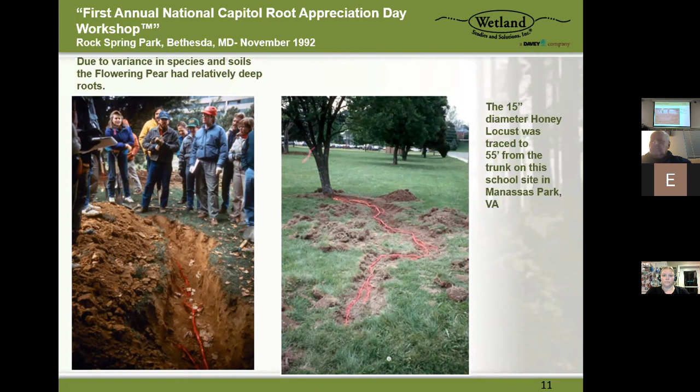In the pictures, you'll see the roots, after they're uncovered, are painted with chalk paint to make them visible. They're not really bright orange — in one of these other pictures, I think they're white — but I always get that question. You can see that they're very shallow.

And they go a long ways away from the canopy of the tree. Here's an example: this is a Norway maple, only 12 inches in diameter, and it's got roots mapped out 36 feet from the trunk of the tree. With some of these, it got to the point where the roots were so fine that we just couldn't follow them anymore, but they did keep going. Most of them are very shallow — the top few inches is pretty typical.

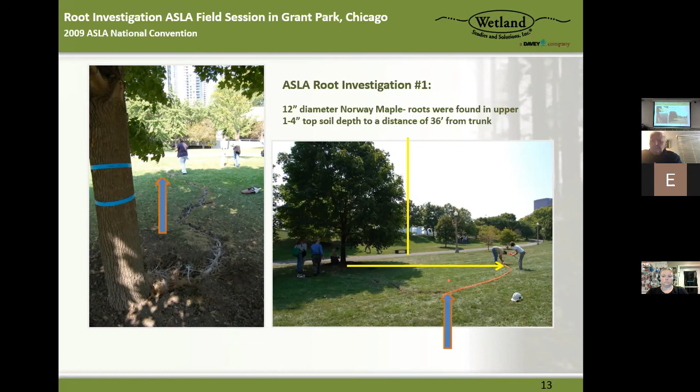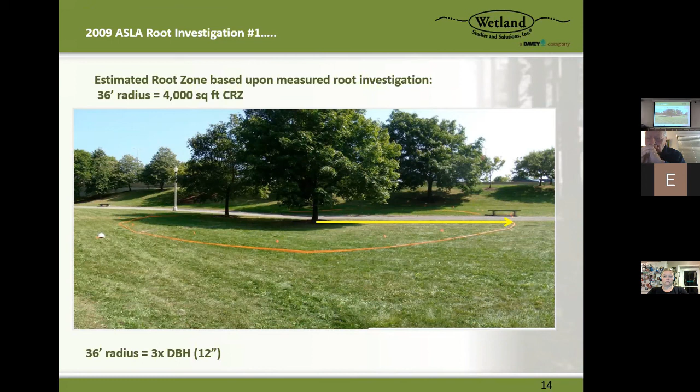Okay, come on, there we go. So here's that same maple tree with a 36-foot radius circle shown around it, and that's where its roots were.

Here's another example, a 30-inch hackberry, and this was a more compacted site, so the roots were slightly deeper, but still, we didn't find any roots deeper than about 18 inches.

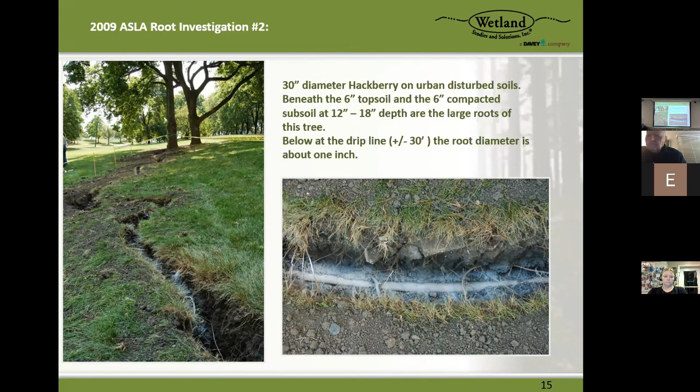And the roots went out 76 feet. Again, we traced them out until they were nothing but little thin fibers, and it got to the point where we physically couldn't dig around them without just destroying them. We couldn't follow them any further, but they did keep going.

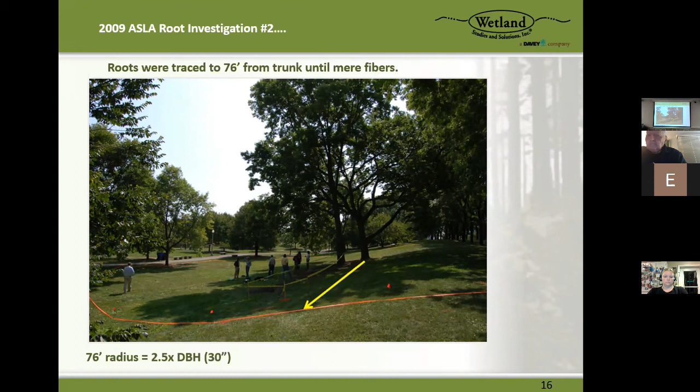So we need to think about construction and think about what the issue is. Obviously, the issue is root damage. It's the most significant problem with development.

Roots can be damaged in so many ways on a typical construction site. They can be cut by utility trenching, grading, just general excavation. There's soil compaction from equipment and material staging, all manner of construction traffic, compaction from fill soil, and there's also the potential for chemical contamination, concrete washout. Just all of those typical construction activities have some impact on roots.

So that begs the question, if we know what tree roots typically do, how much root damage can a tree withstand? How do we figure this out? And how do we get trees in the process, so to speak?

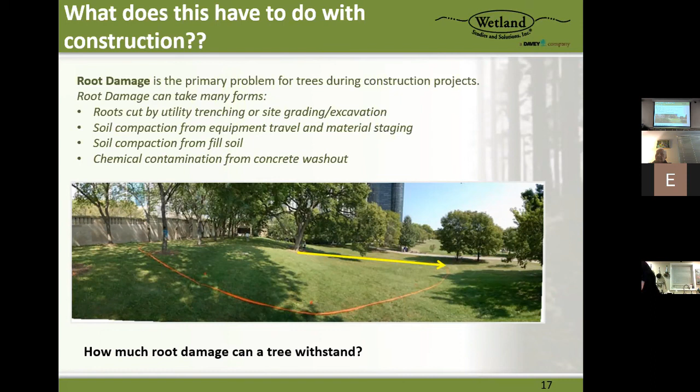But I always kind of throw this in, and let's not forget where trees came from, what they are used to, what they want. Trees don't really want to be near us. They don't want to be near our buildings. They don't want the crummy urban soils that we stick them in.

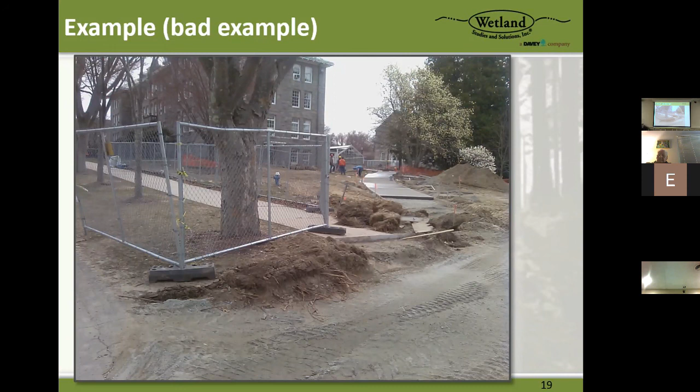But really, if you look, you can see there's roots sticking out. Clearly, there was a pretty significant amount of root damage that occurred on this site with these trees, even the small ones. So here's another example, similar situation.

They've got these existing trees. They dug down probably 10, 12 inches, put in stone, backfill, compacted it, and then poured their concrete.

And remembering what that root system looks like, it's usually pretty shallow, the top 12 to 18 inches, generally not much more than that, if ever, and often much less than that. So a relatively shallow excavation, like for a sidewalk, you're only excavating 8, 10, 12 inches deep. A lot of contractors or engineers might say, oh, it's a shallow excavation, it shouldn't be a big deal. Well, as far as the tree is concerned, that's almost its whole root space. So even though it's a shallow excavation, it's still really significant in terms of the tree's world.

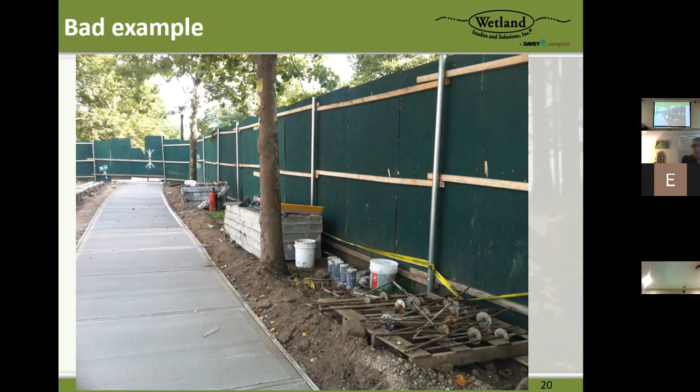So this is a situation where these trees are not very happy. So here's what we do, right? The tree's in the way of the activity. We want to put in a curb.

So we go in, we cut the roots, and then what happens? Well, the tree falls down because we've severed the roots, and now the tree has no way to hold itself up.

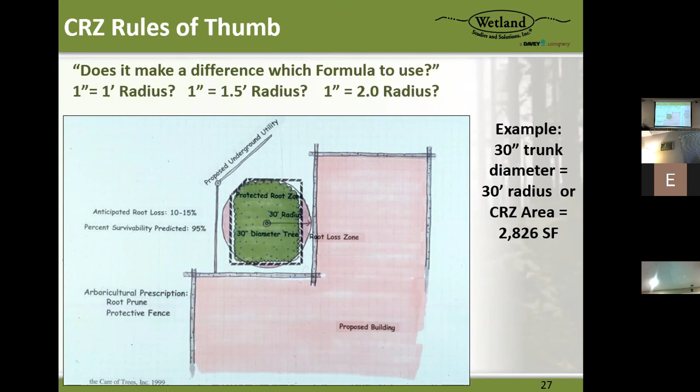But - come on, move forward - what if we draw it at a 2-to-1? So this is 2 feet of radius per inch of diameter. Now, do we feel very good about that tree's prospects?

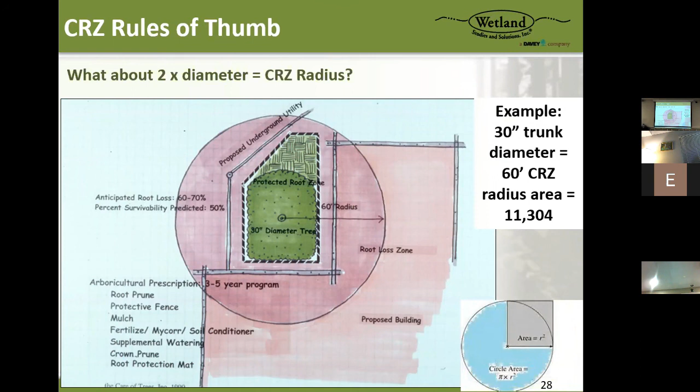No. If we think this is more accurate as far as what the root zone really needs to be, then we're anticipating 60 or 70% of its root zone being disturbed. At that point, you might have years of mitigation, and even with years of stress reduction measures and careful handling, it still is not likely to survive. So we like to look at that 1.5 feet of radius per inch of diameter as a good, reasonable rule of thumb.

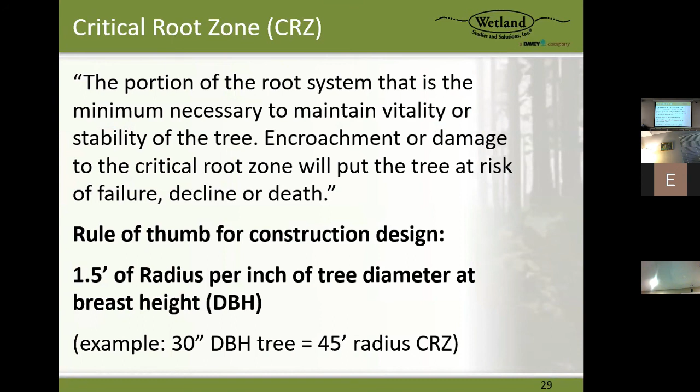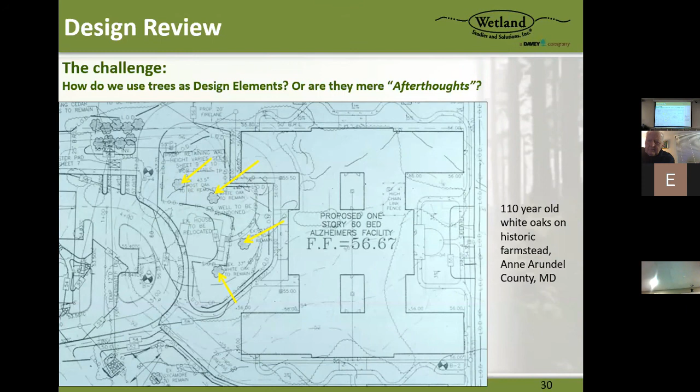One thing I always like to mention at this point is the locations of these trees, especially big trees. The location is critical. Unfortunately, all too often tree inventories are done with GPS that's not survey grade, but what we'd call natural resource grade or even consumer grade GPS. There's a lot of apps out there, and you can use your phone or any handheld GPS unit to inventory the trees on your property.

Those units might seem accurate, and they might claim to be sub-meter or whatever, but in reality, if they're not survey grade, they're probably plus or minus 10 meters. They might be perfectly on, but you have no way of knowing that. You could be 30 feet off. And if you're off even by 3 feet in a design, that could be the difference of the tree being next to the sidewalk or in the middle of the sidewalk.

So having the trees truly surveyed as a part of the design process is really critical.

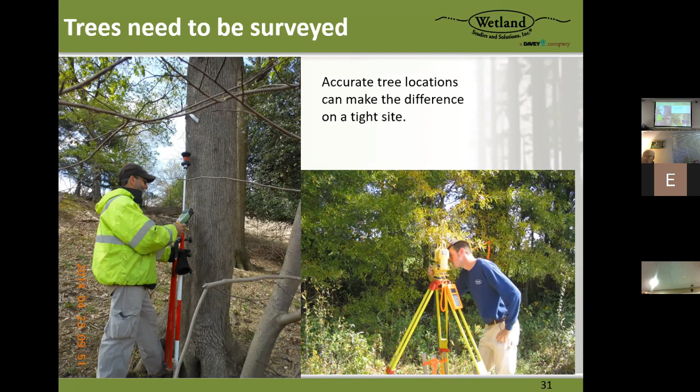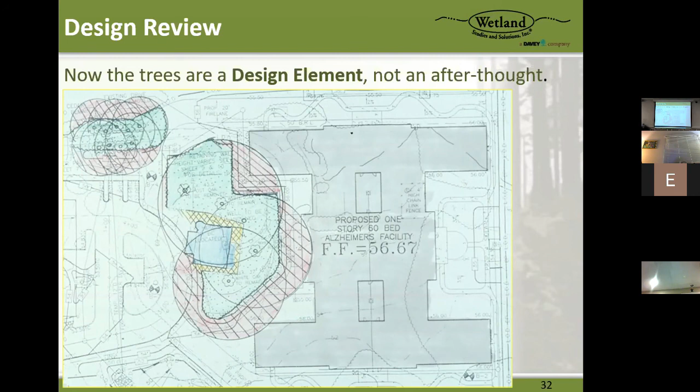The other thing we consider in addition to this concept of critical root zone is structural critical root zone, where this is a much smaller circle around the tree that represents its most significant structural root plate. Meaning if we disturb anything in there, cause any root damage in that little tiny circle, even if it's relatively minor, it could mean the tree becomes unstable. Not necessarily that the tree is going to die, because the overall impact could still be pretty small. But if we have damage to roots within this zone, we run the risk of the tree becoming unstable.

And I always tell my clients, well, it doesn't matter how green the tree is if it's horizontal. That doesn't help us.

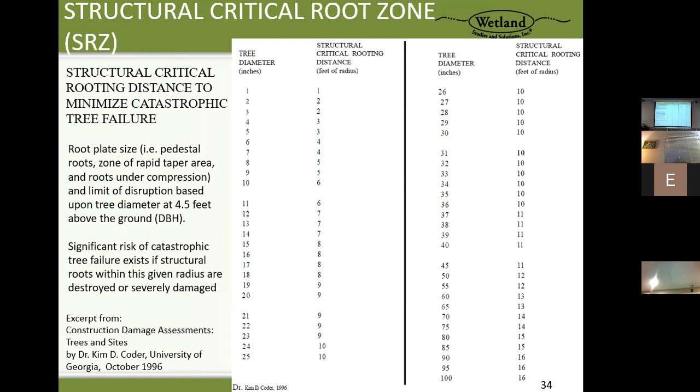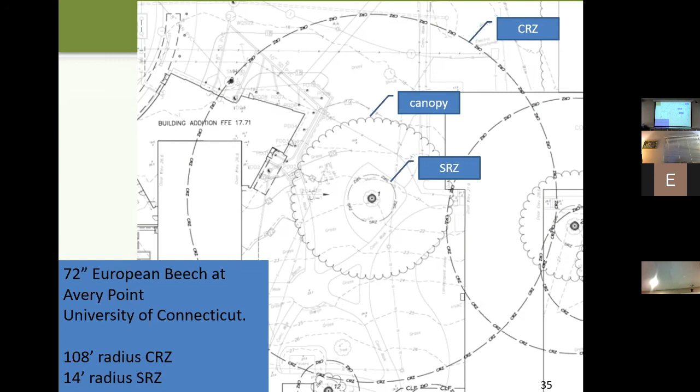So I think I mentioned this before, a little bit about municipal requirements. Municipalities do all kinds of crazy things. Different people means different interpretations, different priorities, different agendas, and every municipality has different people. So you can figure out where that goes. You go to different places and there are very different focuses.

For example, in Fairfax County and Arlington, they both have requirements for canopy credits. There are other places where you have specific requirements for tree replacement counted by individual trees and not just overall canopy. There are places where their requirements don't look at individual trees at all—they simply look at how much tree canopy you have on the site and how much you're preserving. Loudoun County, for example, is like that, where they don't really care about what any one specific tree is doing.

They want to look at the big picture, the canopy of the whole forest preservation. The Maryland forest conservation laws are very similar to that—they don't really look at individual trees so much as the overall forest.

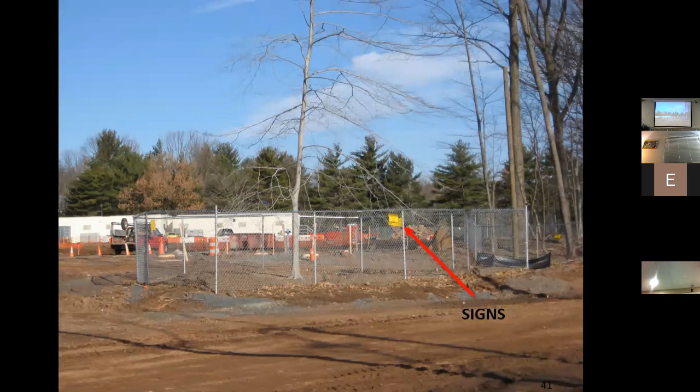Here's a good example of a fairly small tree with a good protection zone around it. Sadly, the last time I looked at Google Earth, this tree was no longer there. This is a project in Princeton, New Jersey—a graduate housing facility that was being renovated.

One of the other more common basic treatments is root pruning, which can be done a number of ways. The simplest is mechanical root pruning, using a chain trencher like you'd use to put in a utility, or in this case a rock saw—a circular saw with teeth like stump grinder teeth that can cut right through pavement and works really well. But the idea behind root pruning is not to protect roots, it's to cut them off intentionally, with some measure of control.

If we draw a line in the sand and let the contractor go to town, they'll go in with an excavator and start digging. Any roots coming into that area get pulled to the side and tend to get torn and broken. So instead of having the roots cut methodically in one known spot, they get broken, smashed, and frayed, and that type of damage is much harder for the tree to deal with than a relatively clean, controlled cut.

A chain trencher or rock saw is still not as clean a cut as you'd get with a chainsaw, handsaw, or pruners, which sometimes we do. If it's a critical location or critical tree, we might prescribe excavating with an air tool or by hand, physically cutting the roots with hand tools, a chainsaw, or even a sawzall, to get as clean a cut as possible and minimize the stress that cut puts on the tree.

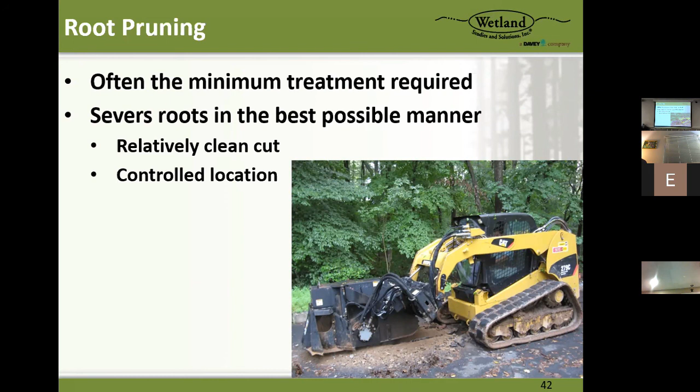But most development isn't looking to spend a ton of money on preservation—they're trying to balance tree preservation with everything else that goes into development. So on a large development site, no one tree really matters that much; what matters is a reasonable effort across a lot of trees. These treatments become the standard go-to approach: fencing, root pruning, and mulch.

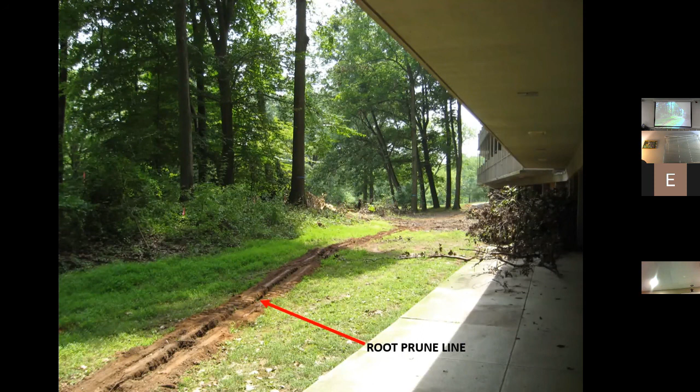So here's just what typical construction details look like. This is what would actually go on the construction plans for the contractor to install.

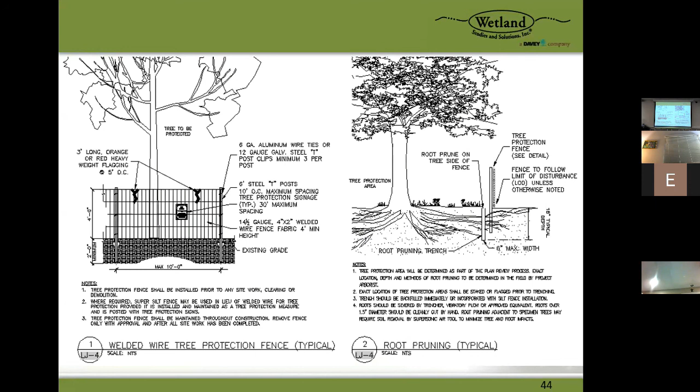And I mentioned mulch. Mulch is probably the single simplest and most valuable thing we can do for trees as a stress reduction measure.

Trees and turf don't like each other. So if we can put down mulch, we can minimize the competition that trees and grasses have by removing the grasses and providing mulch. The mulch mimics that traditional forested condition where the leaves are falling and decomposing.

And you've got nice organic material there for the tree roots. That's what the trees want. Remember the picture of the mountains and the trees. Picture the understory of those trees - that wouldn't have been grass. It would be leaf litter on the ground. That mulch mimics that condition.

The other thing that mulch can do, especially on a development site, is help manage soil moisture. So if we've got a construction site with that limits of disturbance line - that line in the sand - we know we're going to lose all the roots over there. But if we cut off the roots where we know we're going to lose them, and then do everything we can to protect what's left by putting some mulch down in that zone, right where the roots are cut and back into where they're preserved, it helps manage the soil moisture, which further reduces the stress to the tree.

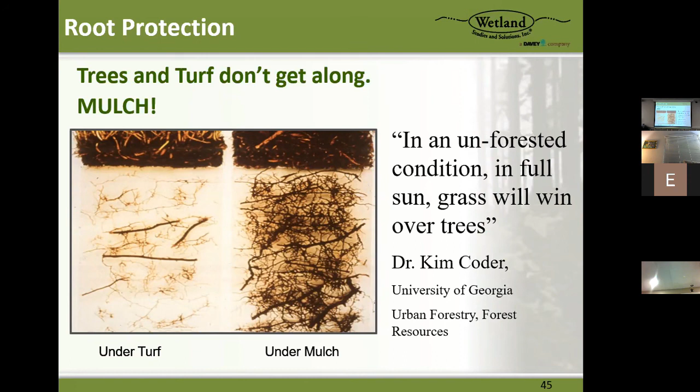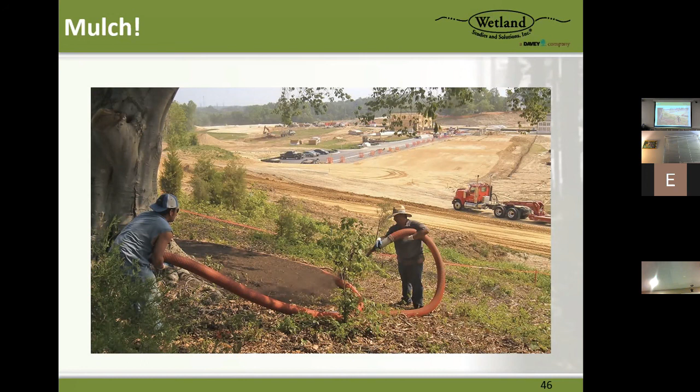So there's some other really cool things we can do, thinking outside the box, to provide additional protection to tree roots on construction sites where historically they might not have been able to be protected.

So this is an example of what a temporary staging area or a temporary construction access road might look like. And this is what it looks like in reality.

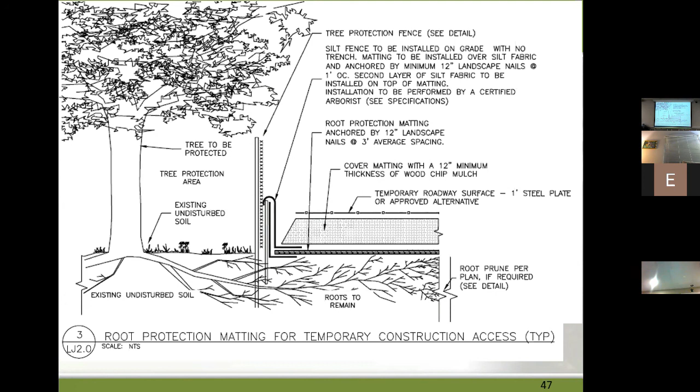They were moving it around with equipment and so forth. So we designed this temporary protection zone, very similar to this design, where there's mulch and a matting material that provides some separation and protection to the tree roots to help minimize soil compaction during the staging process. And then when it was all done, this was all taken away and put back the way it was. The design minimized the soil compaction that would have resulted from that staging material.

So what if the impact is a permanent condition and we want to try to save roots under a permanent new structure? Here's an example of what we call root aeration matting, where we would put this down.

At the beginning of the project, before they bring in any fill material, and instead of root pruning at the limits of disturbance, we're able to use this material to put the fill on and move the root cut further away from the tree.

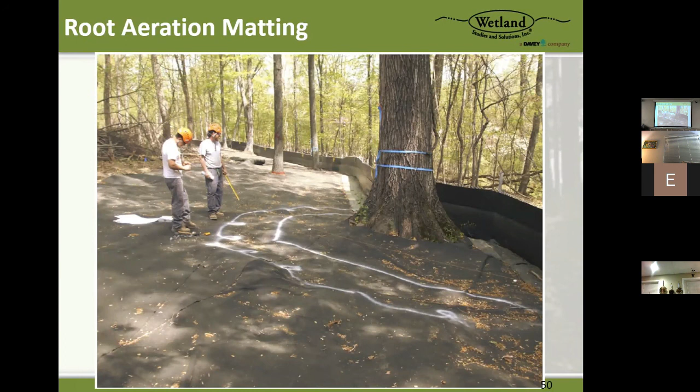Yes, that is a long-term situation, that doesn't happen overnight. The matting material will last for many years, so it takes a long time for it to break down, and a long time for the tree roots to work their way up through it, but they definitely will. Does that answer your question? But that's the whole concept here, that we're buying the tree time to adjust to its condition.

So how are we on time? Oh, we're flying right along.

So here's an example project. This was a project in Maryland where there were a couple of very large trees adjacent to an existing house, and they were proposing to do some additions.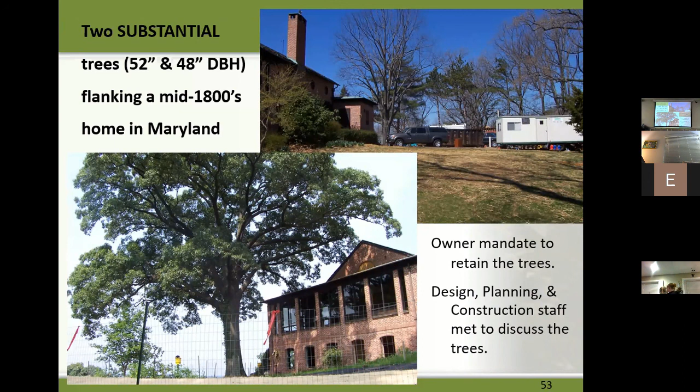This picture shows how close the tree is to the house, and how large the tree is. In the foreground you can start to see some of the markings on the ground where they were considering placing structures, and you can imagine that's well within that tree's critical root zone, probably within its structural root zone.

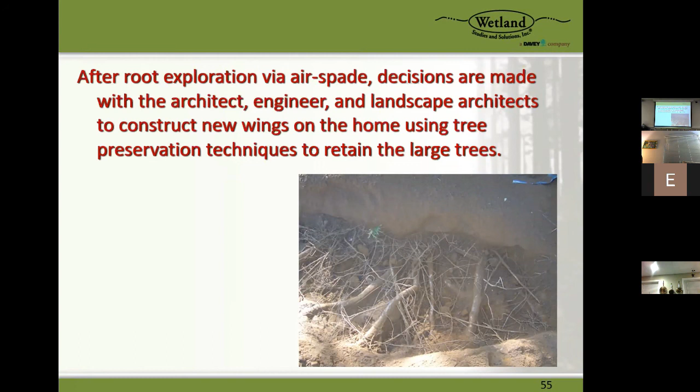This was one of the rare conditions or projects where we actually got the opportunity to go out there and dig up the roots, figure out exactly what was going on, and then work with the design team, the architect and the engineer, to massage the design of the project to minimize root damage and work around the tree as best we could.

So there's an idea of what the site looked like. And here is where we've done some root pruning, and also provided some temporary root protection matting - you can see the fencing material.

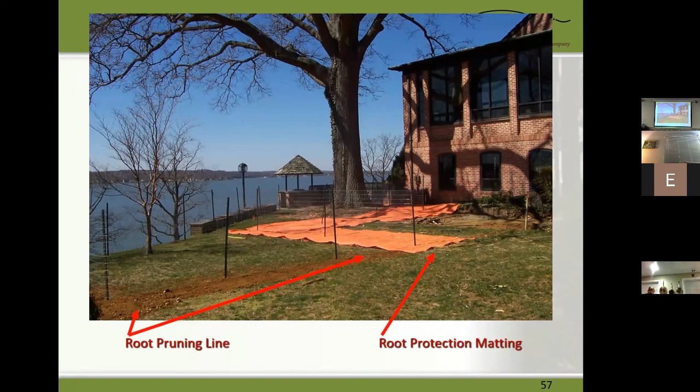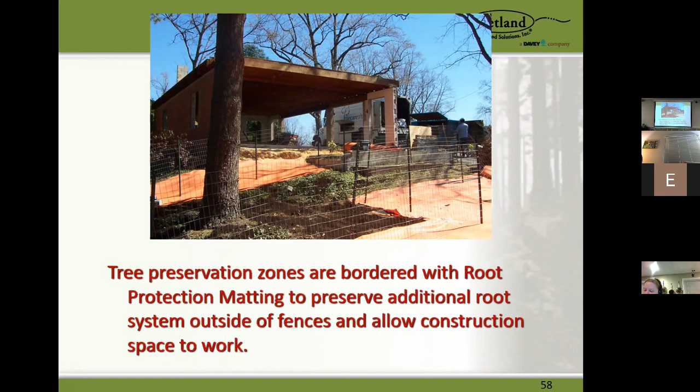The root protection matting, the orange matting, is intended—again, that's a temporary condition like the staging area—only in this case it was really meant just to protect the tree roots from the construction, the contractors' workers, from essentially just their foot traffic and wheelbarrows and things like that. You'd be surprised how much soil compaction just foot traffic can cause. But the matting material helps to mitigate that so that they can go in and build what they need to build and still have those roots survive that condition, or survive that activity.

The other thing that was interesting here is we knew that if they were to go in and build using a traditional footing and foundation wall type construction, there would be no way to do this successfully and preserve the tree. So the solution was to design the structure with pier and grade beam and a fully supported floor, so that there was space between the piers where tree roots could be left alone and left to survive underneath the new structure.

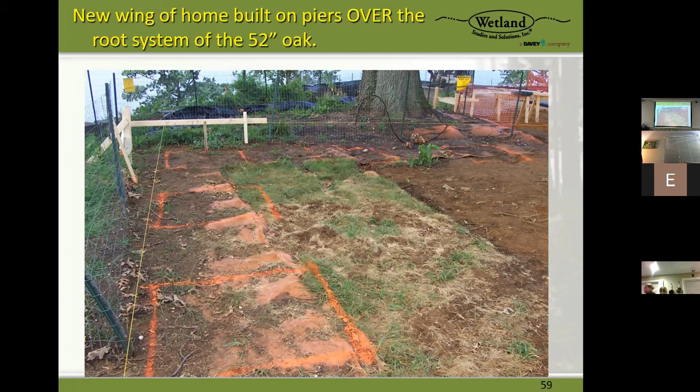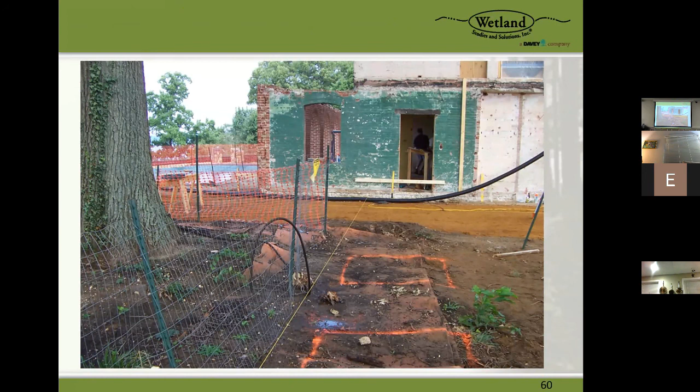So again, that's more pictures of the pier locations mapped out and the tree. And here was the process for excavating the pier holes.

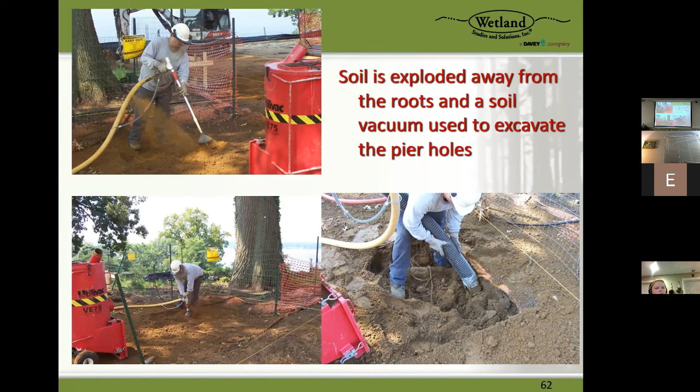The red thing that you see there in the pictures, what is it called? Utility vac—we always called it the supersonic shop vac—where this thing gets connected up to a big commercial industrial air compressor, and they use the air tool to blast the soil out of the way and loosen the soil all up, and then they use the supersonic shop vac to suck the soil out of the hole. In doing that, they were able to gently get all of the soil away from the tree roots.

Once they opened up these holes, we were able to field adjust the pier locations. We had to prune some roots, but we didn't prune all of the roots. We were able to adjust the location of the pier so that we didn't have to prune the biggest roots. You can see in this picture there's a really large root and a bunch of smaller ones. We probably cut many of the small ones to accommodate the pier, but we were able to shift the pier around to avoid the largest roots. And because we're doing piers, there's space between the piers where we didn't impact any roots.

Personally, I don't think so.

The question was, how long can you leave roots exposed? Is there a time limit? I've heard different arguments on that. Some specifications require wrapping the roots with burlap, then moistening them and wrapping them with plastic, and all of this and that. Personally, I don't think leaving a tree root exposed is significantly detrimental—maybe that's the polite or correct way to say it. If you think about it, everybody's seen tree roots that are surface roots. Everybody's seen a stream bank that's been eroded where tree roots are exposed. They're still healthy, they have bark on them. Bark does its job, and just like the bark on the trunk of the tree protects the viable tissue below it, the bark on the roots will do the same thing. I'm not pointing at any specific research or study that says that—that's just my own anecdotal experience that I don't think it would be a huge detriment to leave them exposed for at least the duration of a construction project, where this would have only been open for days or a week, maybe a couple of weeks at the very most, if that helps. So that's my philosophy, if nothing more.

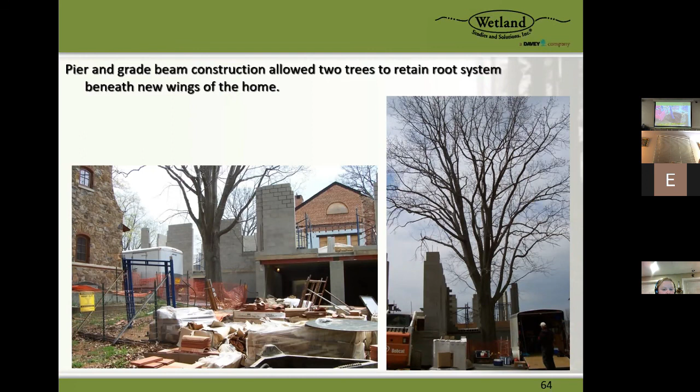But let me get to why this thing stops moving forward. In this picture—where's my mouse—you can see this is a relatively modest addition, relatively small footprint compared to the size of the critical root zone of that tree. So, like I said, the construction activity was well within, even for a tree of this size, the structural root zone. If we were to do this using traditional methods, that tree would have zero chance of survival, or nearly so.

And actually, it would have been likely to just fall over and hurt somebody. This method allowed us to preserve not only the roots under the structure, but the roots beyond it. This tree's root zone goes way out in the yard in all directions on the other side of this new structure. Because we didn't sever the roots for the new foundation, those roots we worked around were able to keep going out the other side. So yes, there's an area underneath the footprint of the building that's going to have a little less moisture, but all of the rest of the roots are still there.

Just like I said with root protection or root aeration matting, trees can handle change that comes slowly. So it's entirely probable, in my mind, that the fine fibrous absorbing roots directly underneath this structure will probably slowly die off as that soil dries out some. But the larger roots that connect from one side of the structure to the other are still there and still able to do their thing.

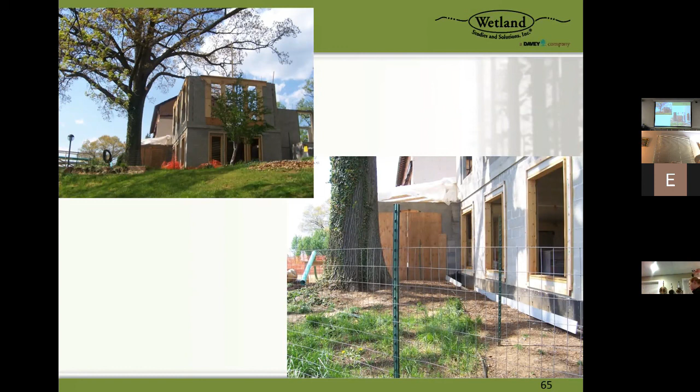All right, shift gears a little bit and talk about utilities.

Utilities are the other big factor with development. We can't have our society as we know it without utilities.

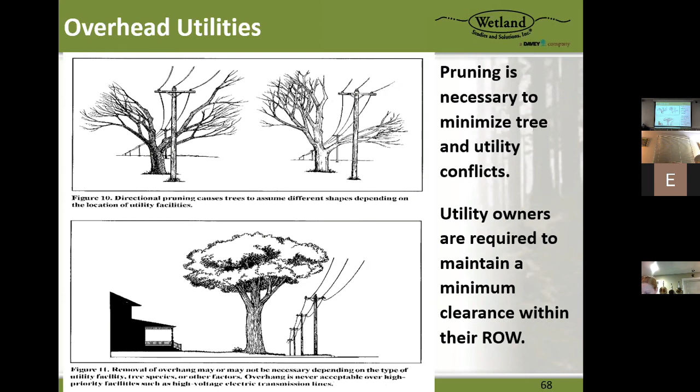Now, what would be better yet is the right tree in the right place. I'll talk about that a little more in a second. This is another example of the same kind of pruning. This is a tree with a good shape. With a little bit of pruning, that utility can be maintained without destroying the structure of that tree.

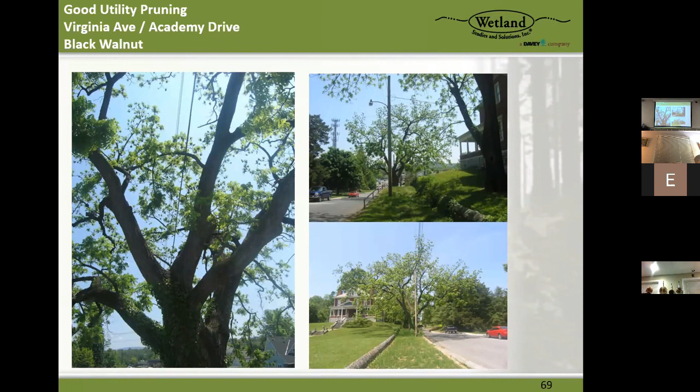And like I said, right tree in right place. Sometimes we don't have a choice. The utility is where it is, the tree is where it is, and we have to deal with it. But if we're designing, we want to design and plant new trees that are appropriate for the space. So we wouldn't put trees that are going to grow big in a space where they can't. We would put small trees underneath power lines and so on.

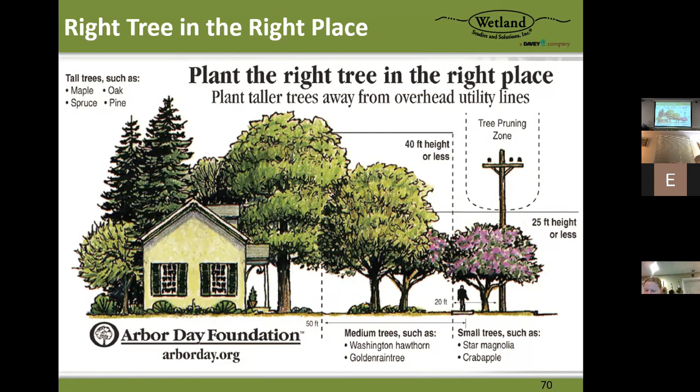There's another example, sort of an extreme example of utility pruning, but as ugly as that looks, that's a whole lot better than the alternative of having the tree be topped every year.

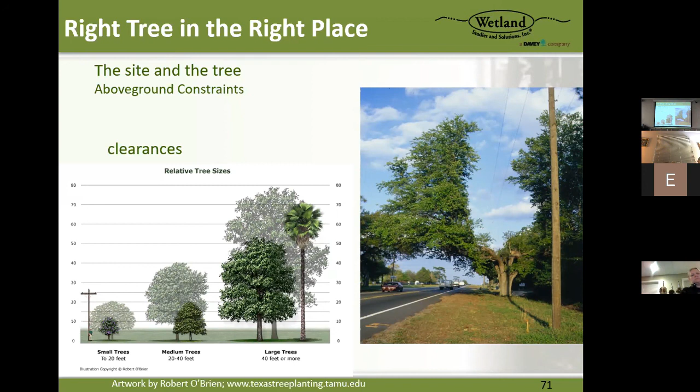But I want to talk about underground stuff because I like roots. And again, in my world, we deal with construction and design. We're almost exclusively dealing with tree roots.

So here's an example of a simple utility. I'm not sure if that's a stormwater drain or something like that, but it's a relatively small utility in a relatively small trench, and most contractors or designers might look at that and go, that's nothing, that's not a big concern. But if you look really closely, you can see that there are an awful lot of roots in that picture. And yes, I stole these pictures off some random website.

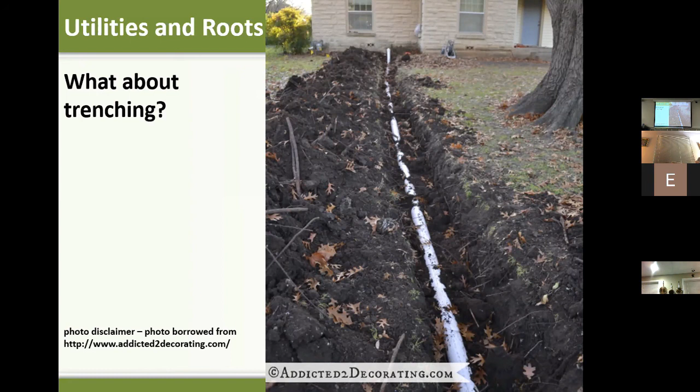This way, there we go.

So again, how far away should that trench have been? If we're looking at the critical root zone of this tree, I don't know how big it is, but if it's 30 inches or more, that trench should have been 40 to 50 feet away to minimize impact to the structure or critical root zone. But this is a little suburban lot, so they probably don't have enough space to move the utility that far away. So there's other ways we can deal with that.

And this was a park setting, and there were trees everywhere. And of course, being the State Capitol Park, there was no room for error. We were told flat out, well, we need to keep all the trees. So we were tasked with coming up with construction methods and protection measures that they had to deal with. The contractors weren't super happy with it, but the end result was the trees survived and the client was happy.

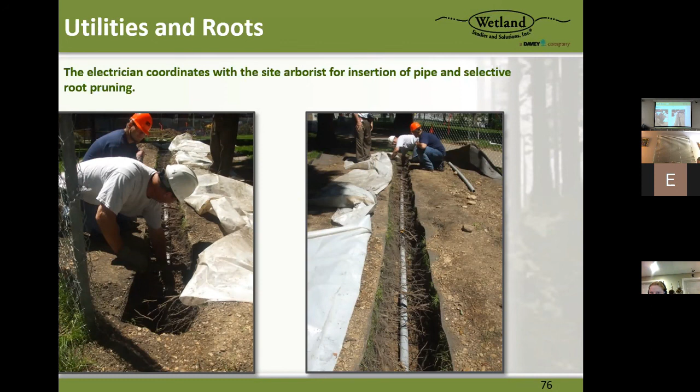So there's a few other ways we can deal with it, depending on what type of utility it is. A lot of either pressurized utilities, things like domestic water service, gas, natural gas, or dry utilities like electrical conduits or telecom, can very frequently be installed using directional boring.

And this stuff is fascinating. The technology that they can sit that little machine down and use sections of pipe, push it in the ground one section at a time, but steer the thing all over the place. They can steer it wherever they want.

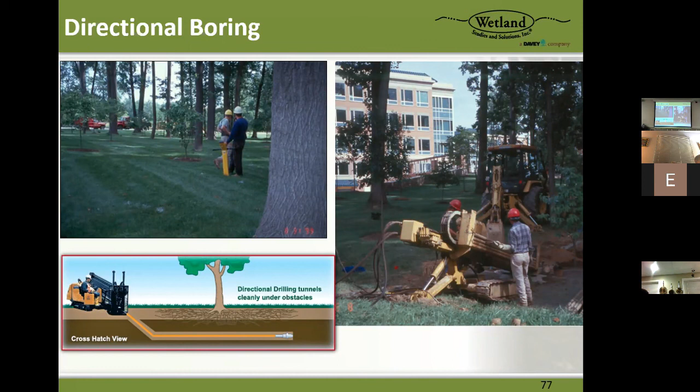Now, thinking back to that Morton Arboretum poster with the root zone, we know that tree roots are fairly shallow, and most utilities want to be deeper than that. So if the design team says, well, my water line needs to be below the frost line, and that's 42 inches, I can say the tree's roots probably don't go that deep, or if they do, very few roots are down that deep. So if they can install their utility using this kind of technology, as long as any excavations needed to connect it are outside the critical root zone of the tree, there's essentially no impact to the root zone. We can drill underneath the tree and avoid that impact almost entirely.

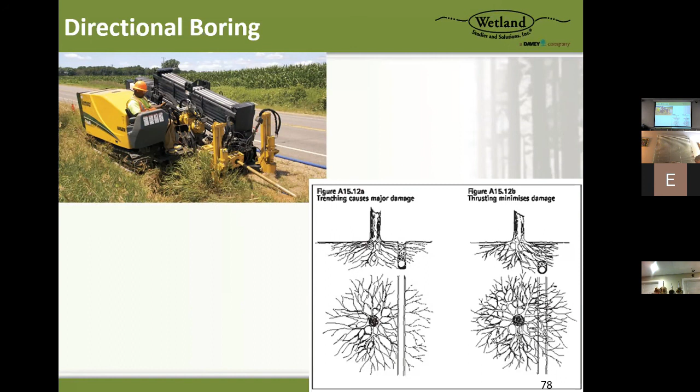So there's the comparison. If we put the utility in a traditional trench, where we open trench, dig a trench, put the utility in and backfill it, we're going to cut off all of those roots. But if we drill underneath the tree, we can sort of sneak underneath there and the tree doesn't even know we're there.

So what about those types of utilities that can't be directional bored? Things like gravity sewers, storm drains, and sanitary sewers that are gravity very often can't be directional bored. Or if they can, well, you really can't do directional boring with gravity. Or, like I said, it's just so large that boring is not really an option. It's too cost prohibitive, so you're in this condition of an open trench. So now the impact from this kind of construction is pretty substantial.

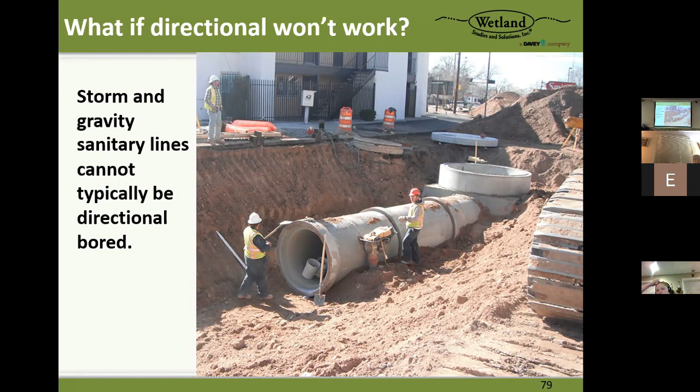So let's talk about an example project. This is New Haven, Connecticut. Traditional sewer system in the town. It was a combined sewer system, if I remember correctly, a 60-inch brick combined sewer where the sanitary and the stormwater were all in the same pipe. The pipe was installed in the 1800s, hand-laid brick. They built the road on top of it, and it's been there ever since. This was still in service up until, I don't remember what year, but certainly within the last 10 years.

Their project was that the city had grown up to the point where they'd exceeded the capacity of the combined sewer. So their project was to separate the sanitary from the storm. They were going to keep the original combined brick sewer and dedicate it to stormwater, and add new dedicated sanitary sewers that were separate.

So the project moves forward, engineers design it, and somebody raises their hand and says, wait a minute, what about our trees? This is New Haven, Connecticut, right near the Yale campus, so you can imagine there are people there who might care. And you can see there are some trees worth caring about, some pretty colossal sycamore trees.

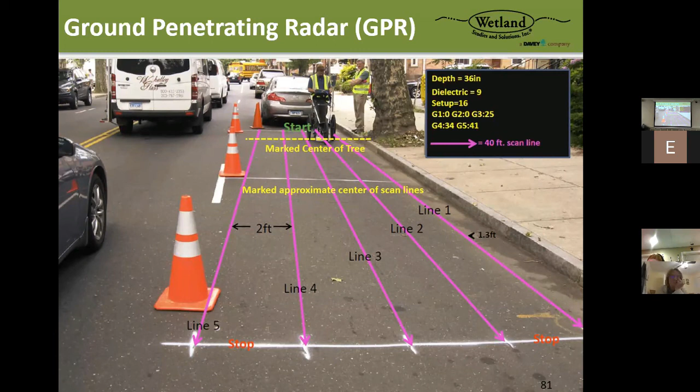So here's an example of how we scanned. We laid out the scan lines in the street and ran the radar over it. This is a friend of mine, Cary, up in New York.

There was a reporter who came out to the site while they were doing this. This was kind of a big deal, and the guy that worked with him coined the phrase that the buggy—the radar unit, the antenna sits in that little tub at the bottom, and the control unit up top—looked like a baby carriage. So the fellow that works with Cary coined the phrase 'the ugly baby,' and of course that's what got printed in the newspaper. Cary's still not happy about that.

And Cary looks like Grizzly Adams now. He's got a hell of a beard.

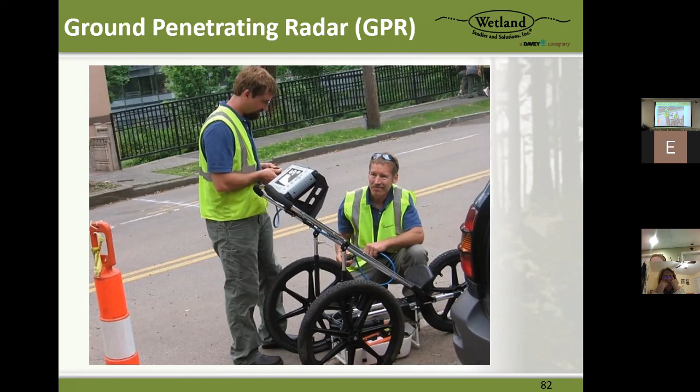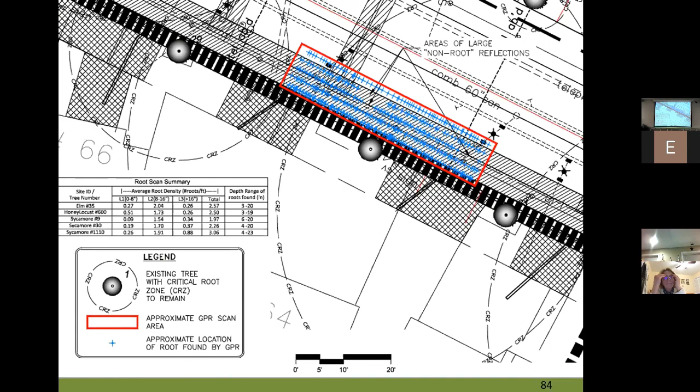There's a critical root zone circle here from this tree, but the critical root zone for this tree is actually way over here. You can see each one of those little blue dots is actually a root detection, where the radar equipment saw a root under the pavement.

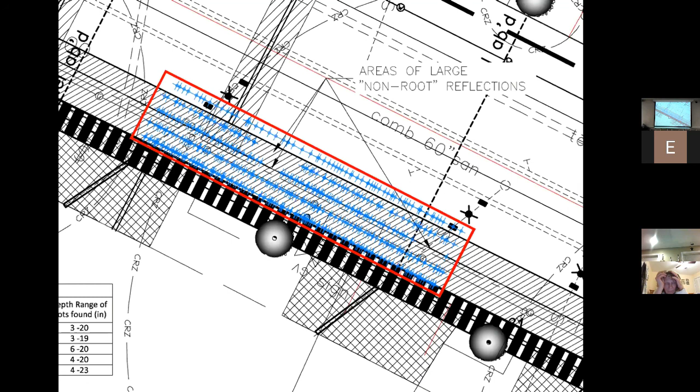So we could demonstrate pretty clearly that there's a lot of roots in the street. So if we do a traditional open trench here, we're going to have some pretty substantial root damage.

So back to the drawing board, we worked with the engineering team on this and came up with the solution of doing what's called jack and bore, where instead of using a directional boring machine that sits on the surface and drills down, they actually dig pits and put a horizontal jacking structure machine in the pit, level it and get it all aligned just right. Then they bore and push the pipe into these holes, and on the other end there's a receiving pit where the thing pushes all the way through, and then they reset and do the next section and so on.

We did almost that whole street this way. The result was, I just talked to my friend Alan who lives in Connecticut, the fellow from our team who was local to the project and did all the field work for us. He said he drove by there the other day and the tree was still looking really good. There was one really large sycamore in particular that was pretty key to the project and drew a lot of attention, and that tree is still doing very well, which is good to hear.

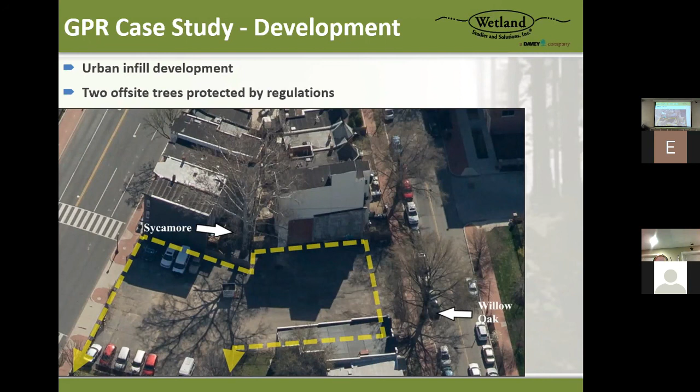So here comes the radar unit again, where we weren't really able to access the site to dig it up with an air tool and map individual roots. And frankly it was a fairly large site anyway, so digging it up with an air tool would have been a pretty colossal effort. The radar unit was able to scan both trees over a fairly large area of the site in less than a day.

So you can see the large sycamore tree there behind the fence on the neighboring property, and you can see the white markings in the pavement is how we laid out the scan lines. Then the willow oak that was the street tree, you can see the sidewalk and the fence, and we ran straight line scans in front of that.

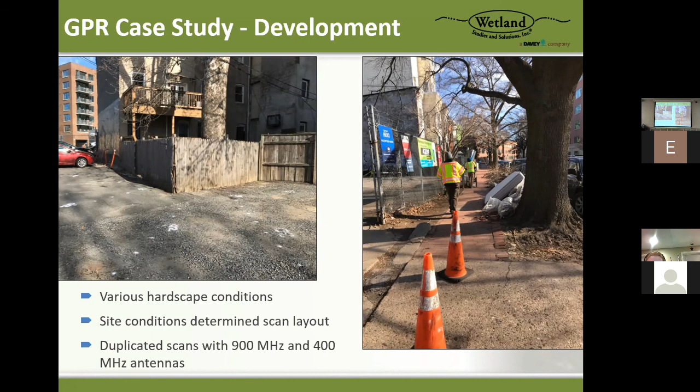You can see how the scan layout looked, where we ran arcs for the sycamore and lines for the willow oak. We actually ran two different antennas that we have for our radar unit. The 900 megahertz antenna is capable of getting reflections down to about 36 inches, and it can reflect off and get a signal back from roots as small as a quarter inch. The 400 megahertz antenna can see and get a reflection back from almost 12 feet in depth, but it can only see roots half to one inch and larger. So if we're looking for deep roots or large roots, the 400 is a good option.

On this site, we really weren't sure what we were going to find. On an urban site like this in DC, who knows what kind of activity has gone on over the years. We didn't know what was going to be down there. So we actually used both antennas and scanned over all of the scan lines twice. We did them all with the 900 and then did them all again with the 400 so that we had double data.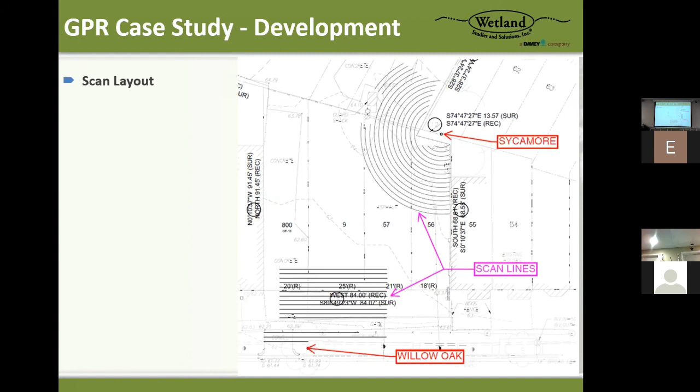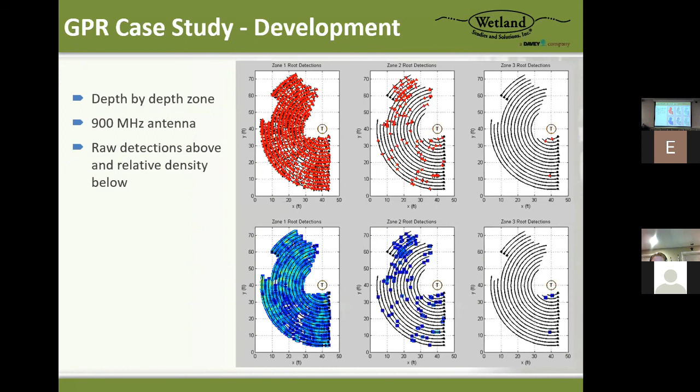So there you can see the area where there's no roots.

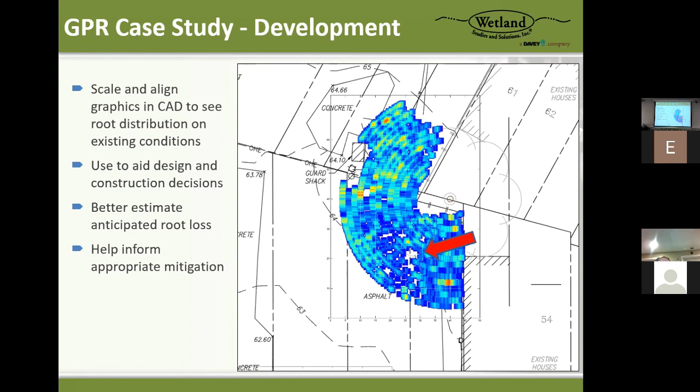This graphic is just a two-dimensional graphic that shows the root density versus the actual 3D model. But it's really cool technology, and I like to talk about it.

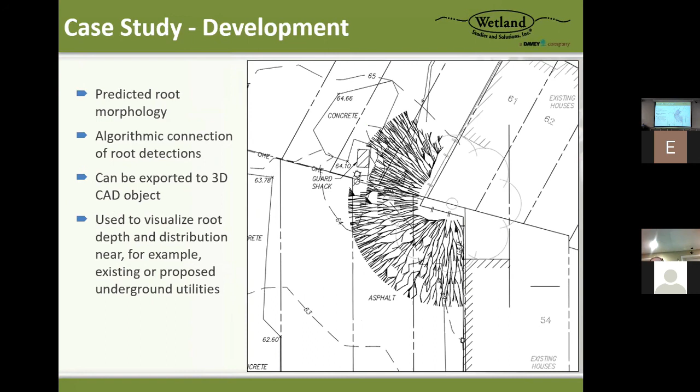So with that, we've blasted through this quicker than I expected to. I'm kind of hopeful that maybe there's some more questions—in the past we must have bantered more. Well, that's the other thing—oh, see, I haven't even gotten through one cup of coffee yet. So, anyway, any questions?

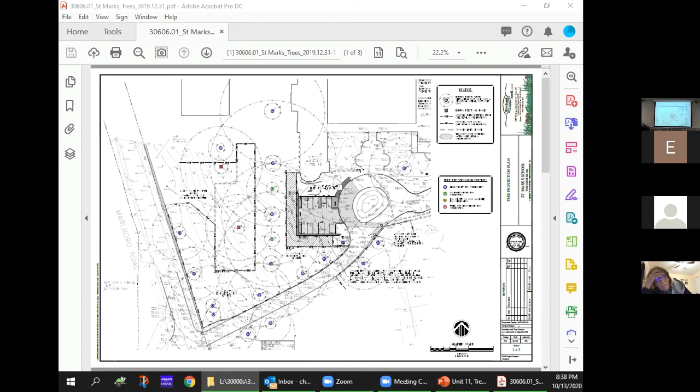So you can see on this plan that there's two different symbols for tree removal.

We know that if we root prune too close to a tree, it's not going to survive. Normally, the root pruning is depicted or dictated by the limits of disturbance on the construction project. So here's an example where we show tree protection fence and root pruning along the limits of disturbance. That's the line in the sand that the engineer has given me and said, okay, our construction is on this side of the line, your tree save area is on that side of the line. Our construction activity will not cross this line.

Fortunately, that limits of disturbance, limits of construction concept, LOD we call it, is dictated by a lot of the erosion control requirements. So this is a typical part of the development design process. Engineers are used to this. So when we come in and do a tree preservation plan, we say, okay, I need your erosion control plan because I need to see your limits of disturbance. And then I would use that limits of disturbance to help me understand what the impacts to the trees are.

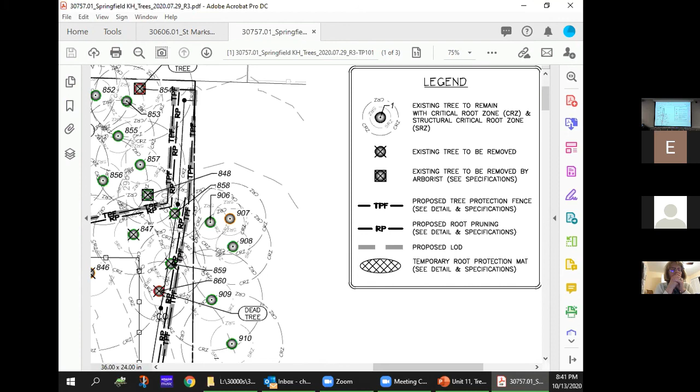So this is a tree by tree condition. We go around the plan and we decide, okay, here's the trees.

So here's an example of trees that are not impacted by construction, but they're declining. They're in poor condition. They're not in a safe place where we can just leave them standing dead. So they need to be removed for safety reasons out of this tree save area. They also have to be designated as a removal by arborist, because we don't want the contractor just taking his backhoe back there and pushing them over. So we designate specifically how they're to be handled.

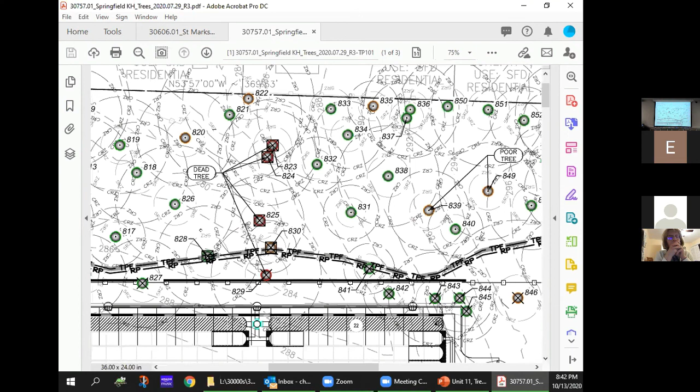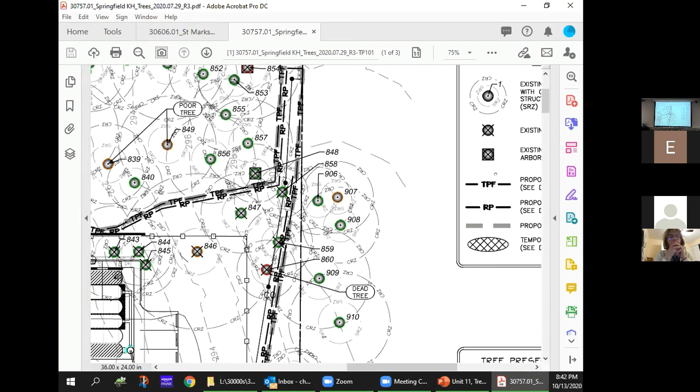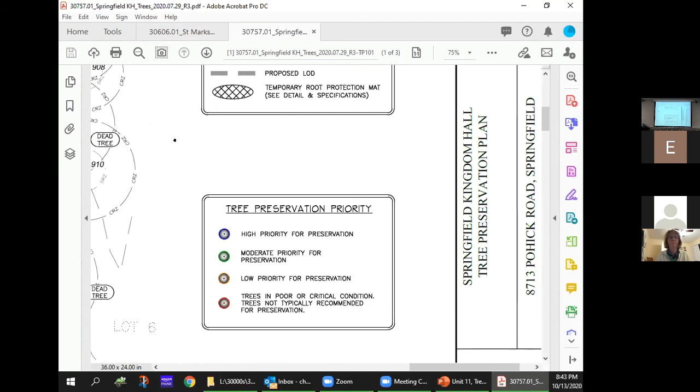And the other thing that we do, if you see on this plan, the trees are color coded. When we do our inventories... hey, where did my cursor go? This is really awkward working. So we do our inventories for these projects. I don't... show the title block.

The inventory includes basic information about the tree: species, diameter, condition, but we also include a preservation priority. For us, we use a 1 to 4 rating normally, where trees that are high priority for preservation are maybe trees that are absolutely excellent specimen quality, highly desirable species.

Or maybe they're a tree that has some unique cultural value. I've worked on projects where there was a whole row of really crummy red maples that were beat up by snow plows and looked terrible, but they were the community's trees. They planted one there every year as a community, with a little plaque on every one of them. Even though the trees were in poor condition, and my initial reaction in the design was they're junk, nuke them, let's put back something that's going to be nice, they said no, those are our community trees. Every one of them has a plaque and there's names and all of this ceremony every year. They matter to us. So even though they were junky red maples in poor condition, we designed our project to preserve them because they were a high priority for preservation for the community and the owner.

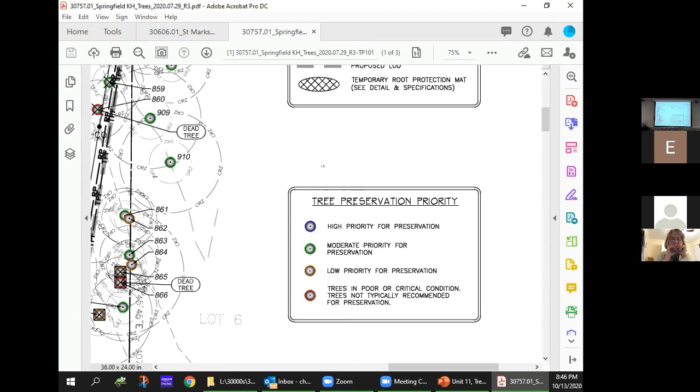So there's a lot of trees on this site. When we were designing the utility connections, we had a little bit of freedom - oh, can we push the utility to the left a little and maybe save this tree? Or maybe can we move the parking lot a little to the left and save this one? And so on.

Having that priority rating on the plans as an initial design step is really helpful - especially, well this isn't a great example because this site was already partially developed and they were kind of constrained. But if you picture a large site that's fully wooded, and okay, I'm going to build my building and my parking lot, here's my plan.

And we color code the trees. The priority 1 trees are blue. The priority 2 trees are green. The reds and oranges are the ones I'm not going to worry about too much. The blues and greens are the ones I'm going to try to focus on saving.

So if we give the design team a preliminary plan that shows all the blues, greens, reds and oranges, that gives them one layer in their design to say, oh, well, we were going to put our parking lot here, but I see there's a bunch of blue trees here. And we were going to put our open space area over here, but I see there's a lot of red trees over there.

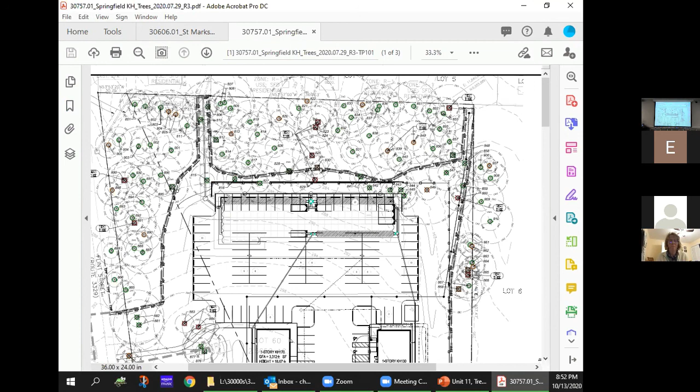So the question was about the situations I would call removal by arborist. This is another good example here where this tree is right next to the fence. We know that tree is not going to survive the activity, but that's where you would want to proactively remove that tree, but do it in such a way that you're not removing the stump. You would cut it down with a chainsaw, or maybe have to hire an arborist and remove it sectionally where it's climbed, or what have you.

But you have to draw that line in the sand and then determine which trees the contractor is allowed to remove his way with the big piece of yellow stuff, or the arborist way with a chainsaw, or the trees that are being protected truly.

And so this picture shows sort of all three. You've got 815 that's in the middle of the storm drain and is obviously going to have to be removed. It's going to be in the middle of the storm drain excavation, so the stump is going to have to be removed. The contractor is going to push that tree over with a big piece of yellow equipment. Tree 895 is going to get beat up so much that it's not going to survive. We know it needs to be removed, but if we remove it with a big piece of yellow equipment, then we're going to start impacting 896 and 897.

But we can't do that. We want to save those trees. So we designate that tree as a tree to be removed by an arborist, where it's cut down sectionally, removed in such a way so that it doesn't impact those other trees, doesn't cause any additional root damage, and we leave the stump in the ground.